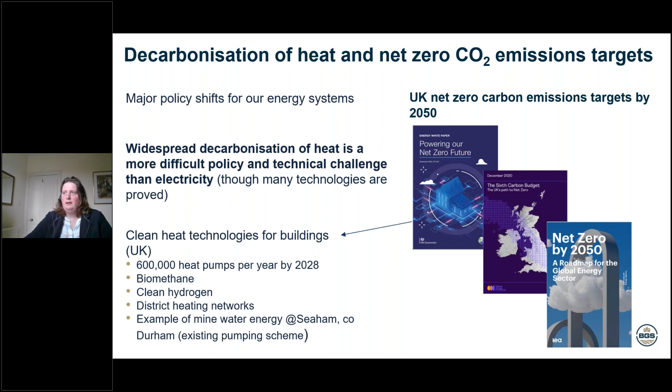And in more of a Scottish context, similarly, the Scottish Government obviously has an energy strategy, a climate change plan. It's done a lot of work around decarbonising heat, current legislation around district heating networks, and so on. The Scottish Government also has its National Performance Framework, which has an environmental aspect to it, which obviously covers energy, and energy from renewable sources is one of the aspects of that. And those link to the Sustainable Development Goals. So there's a lot of policy and strategy around this area, but it is a really big challenge.

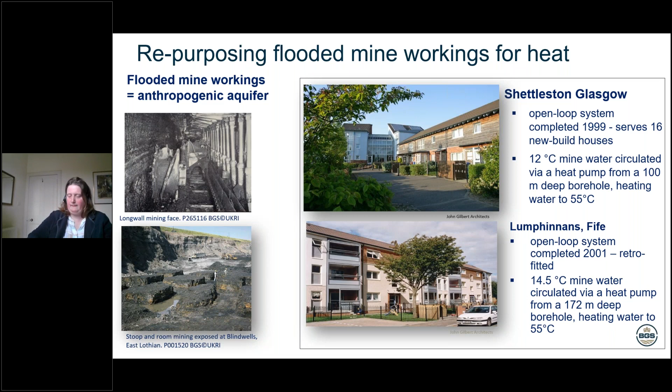So for the purposes of heat, that's very good, because heat is more difficult to transport than electricity. So having the heat where you need it is a really good thing. So the coincidence of urban centres and old coal mines is really helpful. It's also a very large resource. There's an awful lot of coal mining underneath central Scotland. I've not put a number here.

People have come up with numbers for the size of the resource, but really it depends on how sustainable you want the resource to be. And one of the things I'll talk about in the next slide is we can take heat out from underneath the ground. We can also potentially store heat under the ground interseasonally. And so it's not as simple as just saying we can take this much heat out. It's about having a sustainable, renewable system.

So as I mentioned, there are schemes in Scotland, but there are barriers to the widespread rollout of technologies such as this. So there's technical risk, and that's mainly what I'll talk about today in the talk about the observatory. The economic case can be challenging. There's a lot of upfront costs, and then there are operational costs compared to other technologies. And there's still quite a lot to be refined in the regulation and policy arena in terms of heat ownership and so on.

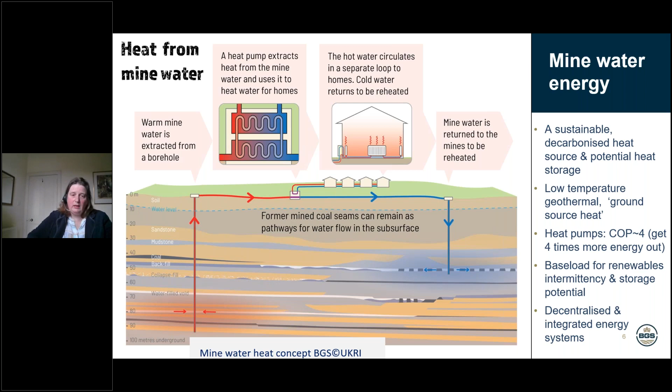the ongoing change. And then we have one borehole as part of the observatory, which is right over in Dalmarnock; this is the deepest borehole. It's 199 meters deep, and it's a seismic monitoring borehole now, but we had a cored geological section from that borehole. The boreholes at Cuningar Loop are of varying depths from 16 meters to about 85 to 90 meters deep. So they're not hugely deep boreholes, but they encounter the coal seams.

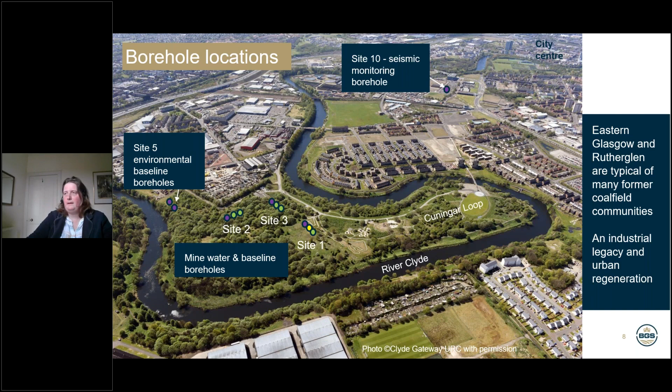So the shallow subsurface in this area is quite complex, and in order for it to become a public park, which is what this part of the loop is, there was a lot of remediation work done in public areas of that park. So it's a fairly typical area of many of the towns and cities across the UK in terms of its industrial legacy, and that's intentional. That is challenging some of the aspects we've had to deal with, but that's really what it's like in the urban area.

There's been a programme of public engagement which is ongoing around the observatory. Possibly of interest today, and I've got some slides on this later on, is there's a lot of work being done on the environmental baseline before we started work drilling the observatory and before researchers come and use it. So I'll talk about that in a little while.

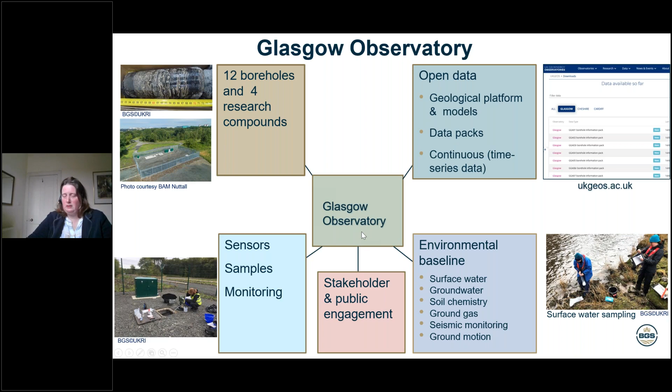And the boreholes have got fibre optic cables down the outside for distributed temperature sensing, and also electrical resistivity tomography cables to do cross-borehole flow monitoring. They also have hydrogeological data loggers within them, and the boreholes are just screened at the section of interest.

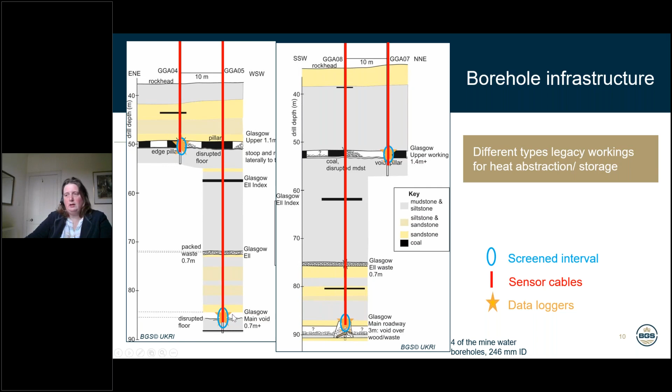So these boreholes are just screened at the mine workings encountered. The Upper is a mixture of wastes and stoop and room workings, and the Glasgow Main, which is the other interval that's screened across, is open voids and mining waste.

And what we're doing at the moment is a detailed design and implementation for geothermal infrastructure to be installed within the boreholes, and for a small heat centre to be installed on site. We don't have a heat user because it's a research infrastructure, and that gives us flexibility. But that infrastructure should be in place by early 2022. And what that means is there's a range of research and development themes that we hope people will come and use the observatory to look at for mine water energy.

Looking at the resource side, the environmental management, looking at the development of sensors and technologies to reduce cost and risk, looking at changes in the subsurface. So what happens when we use the geothermal infrastructure? What sort of responses do we get underground? It's also a place where people can come and do training and engagement to improve understanding of these technologies, and improve the supply chain and training of those who will hopefully be installing these systems in future.

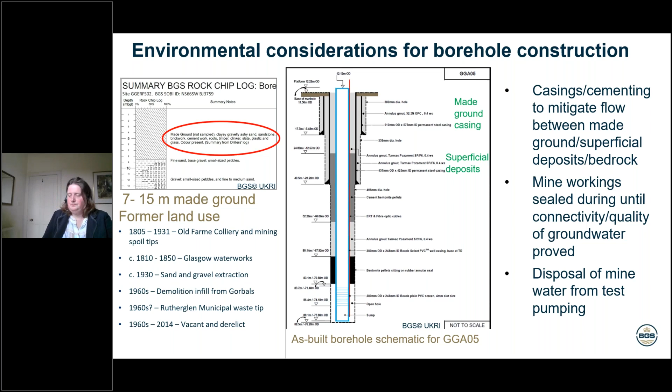Today I'd just cover the environmental baseline briefly. All this data is openly available, so it's just to give you a flavour, and it's something you can look at in more detail. We did soil chemistry surveys before we started drilling, ground gas surveys, surface water chemistry data sets, groundwater data sets, ground motion, and seismic monitoring.

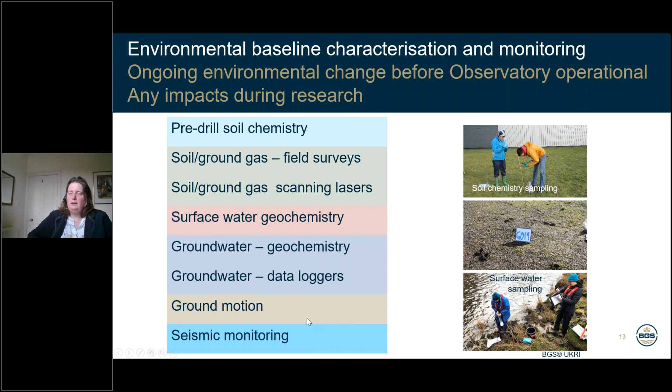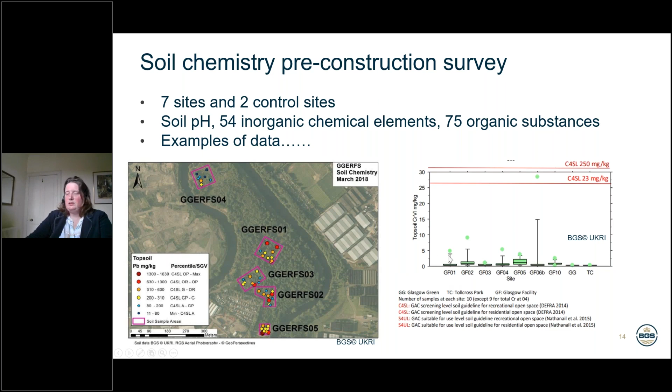Just three slides quickly to show some of that data. This is an example of the soil chemistry data set - a plot of lead, with box and whisker plots in the data set. This is chromium-6, which was a species of interest in this area, and actually was quite low here.

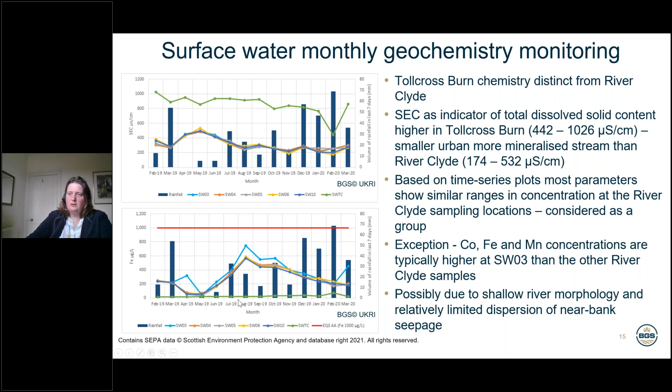These are examples of the surface water data. At the moment there's 14 months of surface water data from different sampling sites, with all sorts of information - this is a specific electrical conductivity plot. These are samples from the River Clyde, and this is from a tributary, which is much more mineralised. This is the plot of iron over the year in the Clyde and in the tributary, for example.

We also did gas surveys, and hope to carry on doing those. The summary of the gas survey so far is that we can't see any evidence of mine gas.

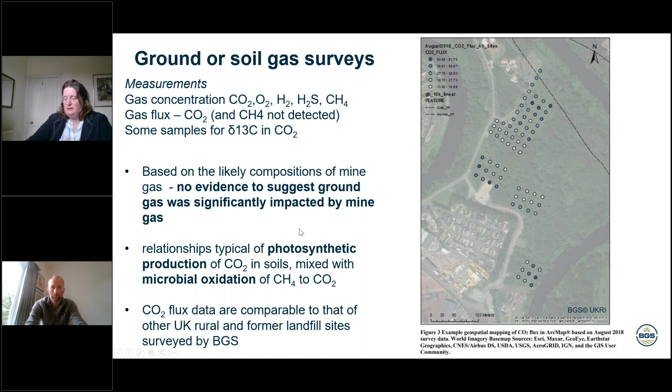I'll just skip this slide. I'm just going to finish off by saying we'd really like people to come and use the observatory. It's there for people to use - the details are on the website - and you can use it for whatever your particular area of research is.

We're really lucky in Scotland - we've got a unique world mine water research innovation infrastructure where people can come and do their own research to increase the evidence base about how to transfer heat sustainably. You can come and study monitoring and managing any wider impacts of those technologies or subsurface change, and innovate technologies all towards the decarbonisation of heat or underground energy storage. Thank you.

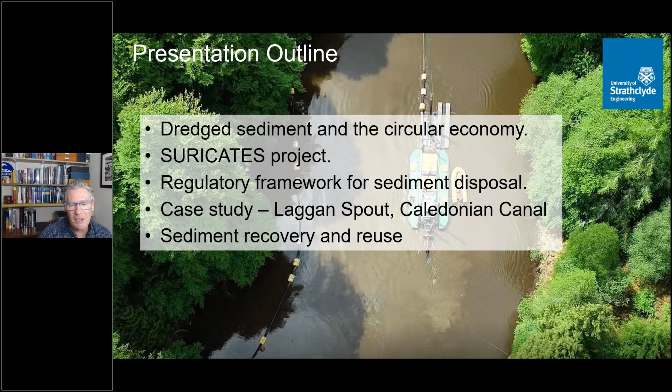So dredging is happening around us all the time. I took this photo last year of the HAM 316 dredger working on the River Clyde, which was there for, I believe, about 6 weeks in total.

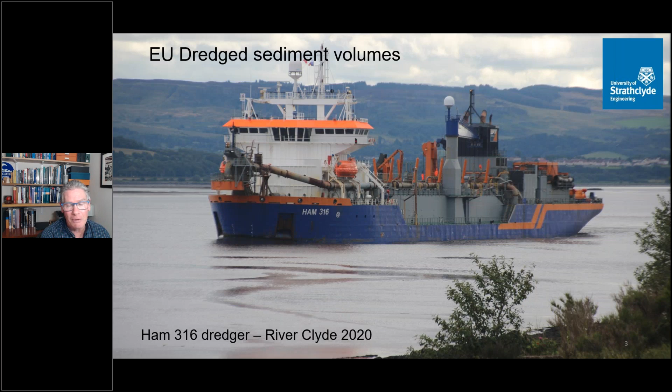Within the EU, there is a large volume of sediment that's dredged, roughly about 200 million cubic meters, which is classed as a waste. Only about 2 million cubic meters of that is reused. So there are great opportunities for more reuse and to contribute to the circular economy. The University of Strathclyde is a partner in the SURICATES project with Scottish Canals, and to date we've run 3 pilot studies on Scottish Canals.

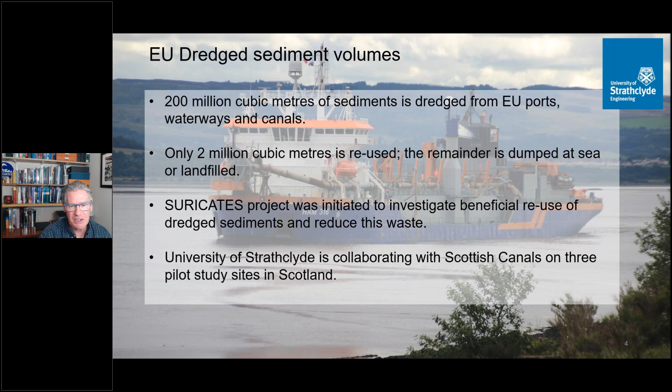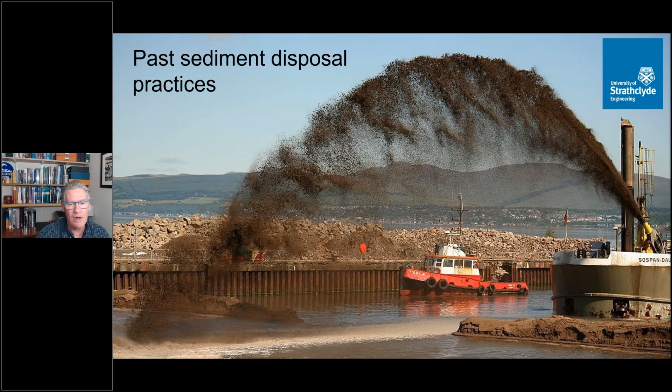Dredging is required in every navigable waterway, including the River Clyde. This was a photo taken a decade or so ago. It shows the practice of putting dredging sediment into some of the old docks along the River Clyde to infill that for future development. This practice is no longer allowed, and the normal disposal method at the moment is to dump that sediment at sea. However, there is a growing realization that we need a more sustainable practice and reuse this sediment for beneficial use.

You're probably familiar with the central diagram showing the circular economy. I've superimposed that on top of a drawing of the Falkirk Wheel, which I think is a nice analogy for beneficial reuse in the circular economy for dredged sediments, where we're taking the sediments and ultimately reusing it for some beneficial use such as flood control. Some treatment of the sediment is going to be required before it can be reused, and I will talk about that via our pilot study case study.

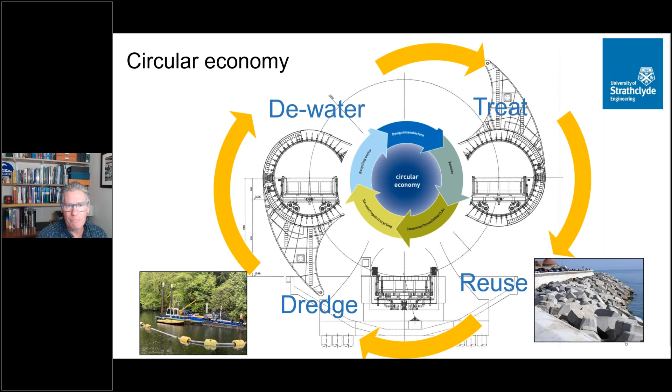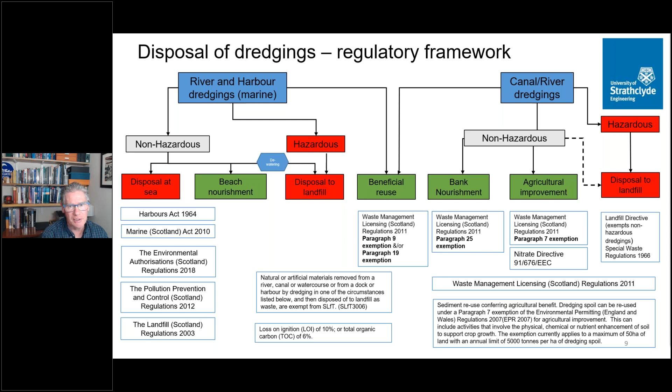Within the land disposal waste management licensing regulations, there are a number of exemptions that can be applied to dredgings, provided certain conditions are met. For this audience, perhaps the paragraph 9 exemption, which applies to brownfield sites, is most of interest. Often brownfield sites are conveniently situated next to waterways, especially if you think of the River Clyde, which opens up possibilities for reusing dredgings on brownfield sites.

Today I want to talk about our most recent pilot study, conducted at Laggan on the Caledonian Canal. This photo is taken looking south down the Great Glen towards Fort William. You can see Loch Lochy in the immediate background.

Looking in the other direction, you would ultimately end up at Inverness. You can see how steep the sides of the Great Glen are in this photo. That's important because the reason we are dredging at this location is because there's a high input of sediment into the canal from one of the many burns that feed into it. This is the Laggan burn, and successive storm events have built up quite a large deltaic structure in the canal that is an obstacle to navigation and has to be removed.

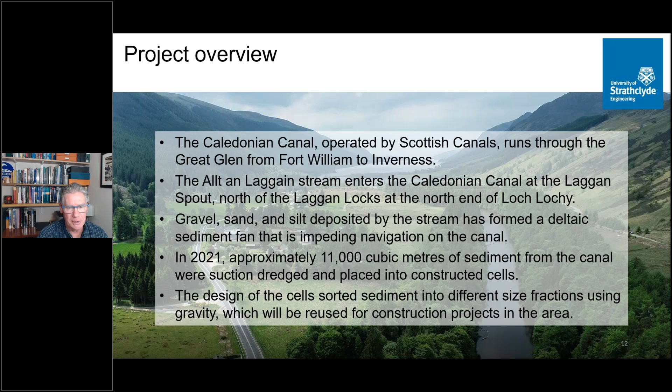In this photo you can just see the top of the sediment fan at this location. The canal should be about 4.5 meters deep at this point, but you can see it's peeking over the surface. You can probably tell it's quite a coarse but clean sediment, unlike the material in the previous slide, which reflects the rural environment and location of this site, and also the geology of the surrounding area.

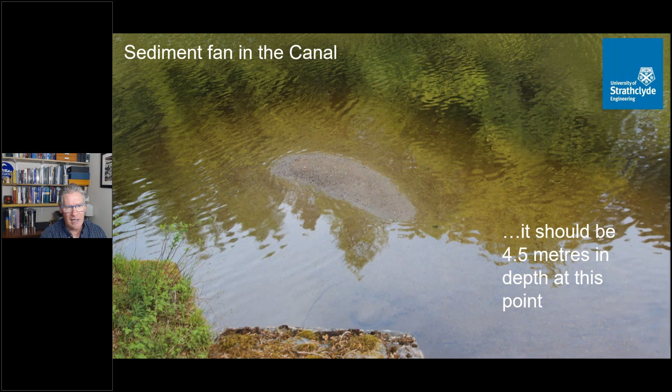We know that this material tends to only go into the canal during large flood events and heavy rainfall, which unfortunately are becoming more and more frequent as our climate changes. So that has a lot of impact on the maintenance of the canal. This is an ongoing problem that will have to be addressed every decade or so.

A major consideration was transporting sediment from the canal to the site. The actual dredging site is not really accessible by any vehicles, so we decided it was important to use suction dredging so that we could transport the sediment via a pipeline to the site, passing underneath the main road and avoiding any additional traffic and disruption to the A82, which is a major road there.

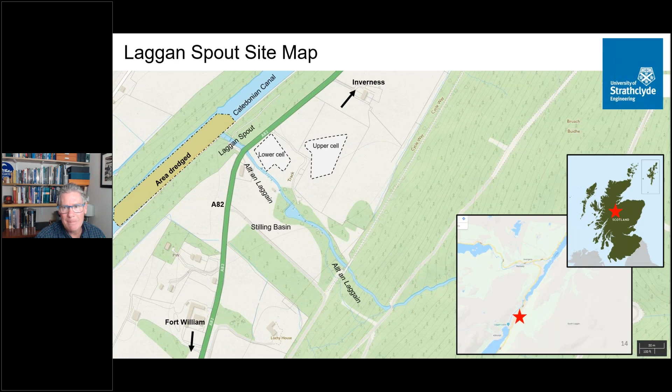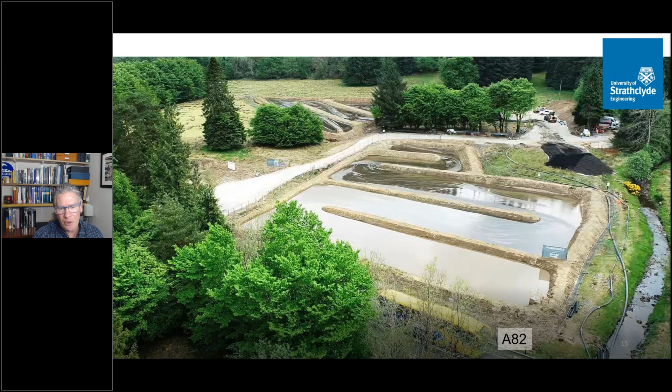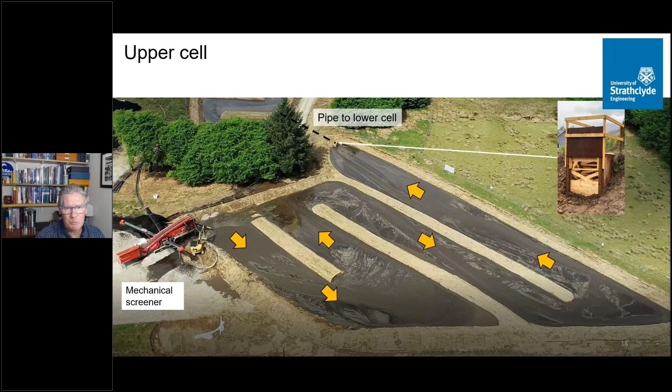You can actually see in this photo, at the top, just how clean the sand fraction is as it comes out of the discharge chute there.

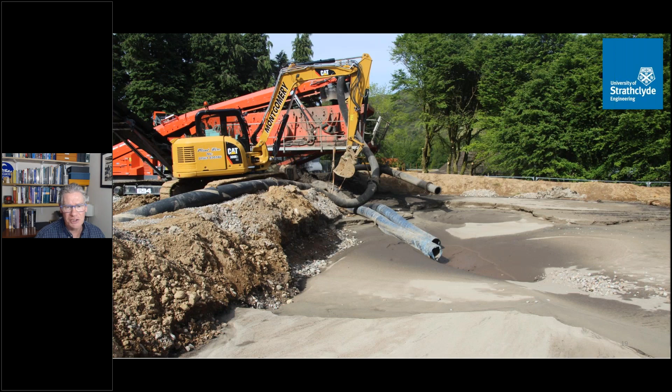In the lower cell, which was connected via a pipeline, again it flows through these bunds and ultimately would discharge back into the canal via another pipeline. The dredger pump operated typically about 12 hours each day, so that overnight settling could occur.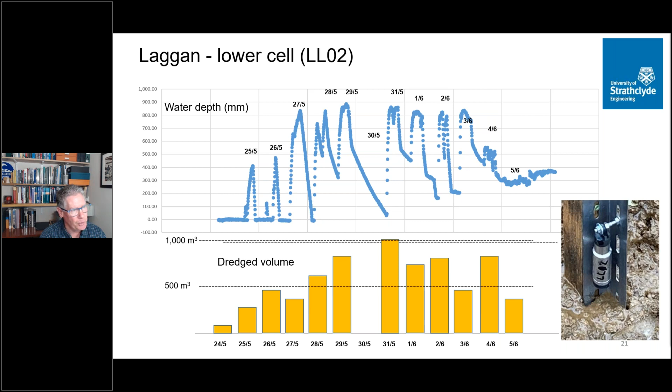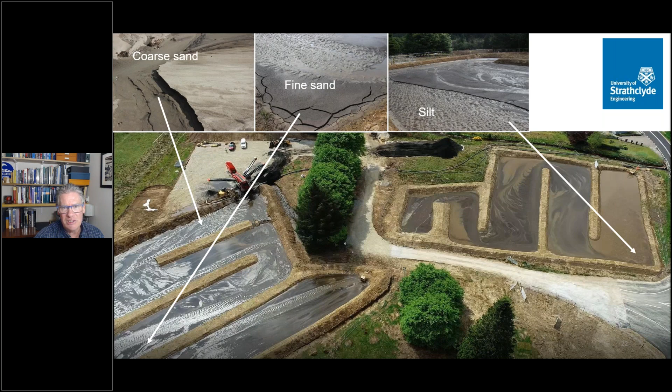Just to put some numbers on that, we're almost 95% sand fraction in the upper lagoon, dropping down to maybe 50% silt towards the bottom part of the lower cell. So quite a good separation there, and really all of the material in the upper cell was a usable sand fraction.

You can also see that the organic matter drops from under 1% in the upper lagoon to maybe as high as 14% in the bottom cell, again showing that the finer material has accumulated with the silt fraction.

So by the close of dredging, we produced a number of different sediment fractions. From the screener, we got smaller fractions and some fairly large cobbles.

If you look at the dark pile behind this, you can see how much of the organic matter is composed of the gravel fraction there, and that's kind of mostly pine cones, which are kind of the same size as that gravel. So the screener was very effective at doing that.

And this pile had kind of had the consistency of bark mulch, and has some uses in its own right there.

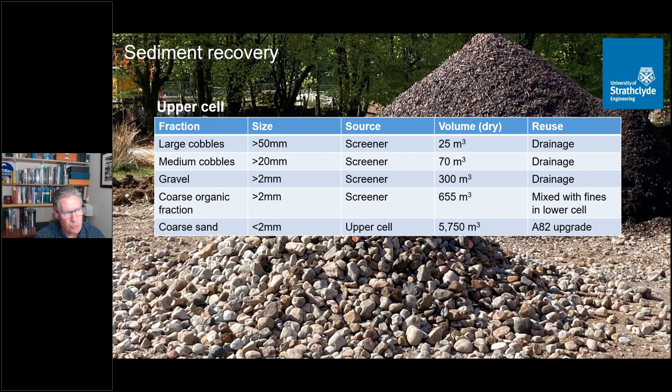This sand fraction we hope to be able to use in a proposed road upgrade at the A82. The organic fraction is going to be mixed with the material in the lower cell, which, as you can see here, is more of a silty loam, sandy loam that really is ideal as a way to restore the agricultural land that was used for this pilot.

So the plan is to really grade that with the organic matter and then return the field to use. We took samples that did meet the BS 3882 specification for topsoil, with the exception of the nutrients, which can readily be added at any time.

A second use that we looked at was to use some of the coarser fractions, the gravel and the sand, to make concrete blocks. These would be used for flood protection on the small Laggan burn. We also made some test blocks, which we tested and achieved a strength of about 7.5 megapascals, which is not bad for a concrete of this type made from fresh sediment.

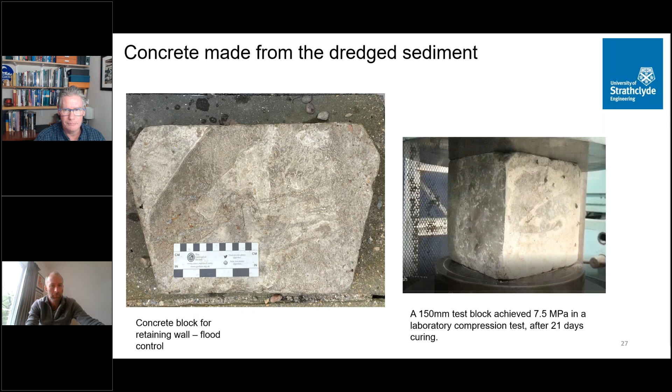So some of the beneficial reuse options - fortuitously, Transport Scotland have proposed upgrading this section of the A82, putting in a new bridge and changing the curve to eliminate a dangerous bend there. These works will require quite a bit of aggregate to build the embankments and do all the earthworks required for this, and Scottish Canals are currently in discussion with Transport Scotland to retain the sediment on site for use in this project, which would probably happen in 2022-2023. We've been able to contribute to the design of that project from the data we've collected on the hydrology of the Allt an Laggain burn that passes through the site.

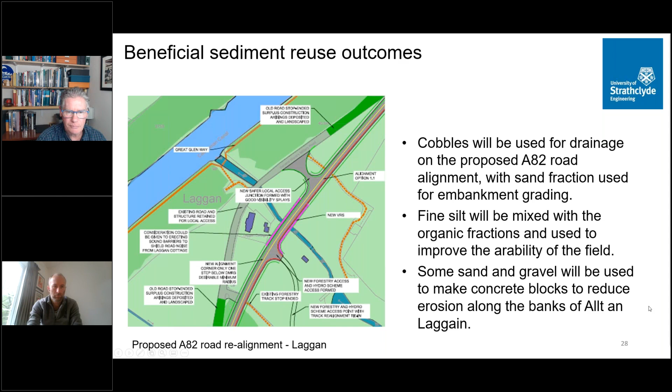So I'll just finish here to conclude. We demonstrated the viability of suction dredging and gravity separation for beneficial reuse, and we produced over 6,000 cubic meters of aggregates that will be available for the A82 road realignment project. The final material in the lower cell is suitable for topsoil and will be used to restore that field to agricultural use.

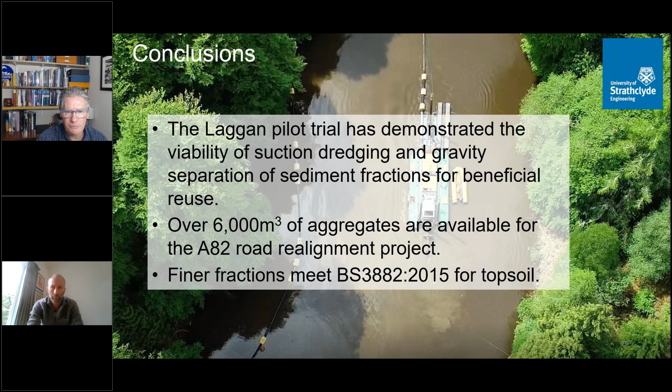And that's pretty much it. If we have time for questions, I'll be happy to take those, or we can save it till the end.

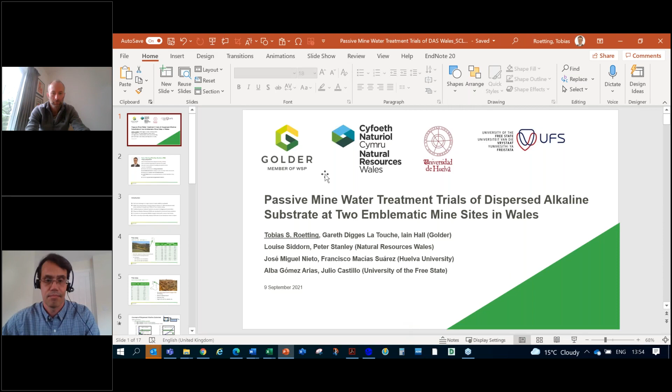Tobias, if you want to just accept that, you should have a prompt. Yeah, should be working in a moment. There we go, yeah. Great, and you should be able to share your screen as well. Brilliant, let me see, I still have a bit of changing over here in screens. Yeah, okay, let me see. That's it, perfect, yeah, okay. Can everybody see my screen now?

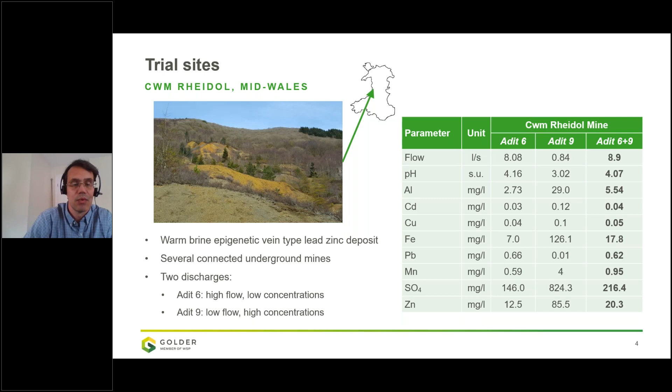The other trial site is Parys Mountain, which is in the north of Wales on the Isle of Anglesey, and this was the largest source of copper in the 18th century, and it's a massive sulfide deposit, which is similar to the mines in Spain where we are operating these systems. It's an open-cast mine, and you can see from the colors, there's a lot of metal leaching going on in the open pit. And we have very high iron concentrations, 650 milligrams per liter, and also significant zinc, aluminium, copper, manganese. And the pH is quite low, 2.5. And again, the full flow rate on average is 8.4 liters per second. And these 2 mines are amongst the top 5 most polluting mine sites in Wales. So finding a method to remediate these waters would be very beneficial.

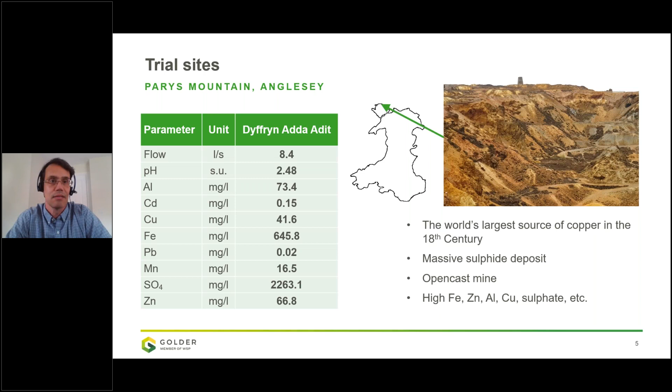So to explain the concept of dispersed alkaline substrate, it is similar to many passive treatment systems, as you can see on the top right, in that it consists of a downflow reactor. So mine water is fed to the supernatant on the top, then it flows down through the reactive substrate into a drainage layer, and then through a swan neck out into a decantation pond to precipitate metals. And in these systems, we want to have a substrate which is, on the one hand, permeable, so water can flow through by gravity, and which is reactive over a long time.

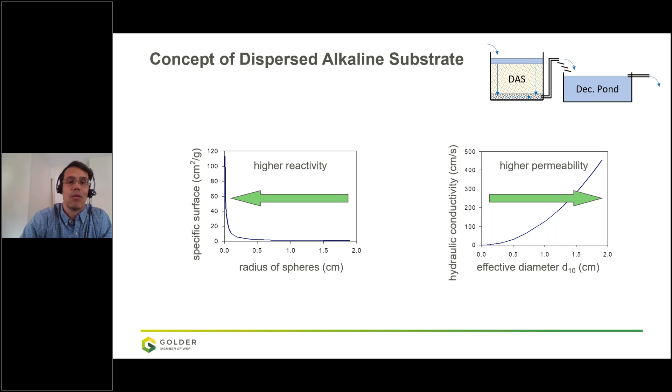Now this is a challenge because to have a high permeability we need a coarse substrate, but to have a high reactivity we need a large reactive surface area, which you normally achieve by having a fine-grained substrate. So what we do is we combine a fine-grained alkaline material which has a high reactive surface and also which enables a larger fraction of the material to dissolve before it's completely coated by metals. And then we mix this fine material with a coarse supporting matrix, which provides a large pore space where the metals can accumulate without clogging the pores completely.

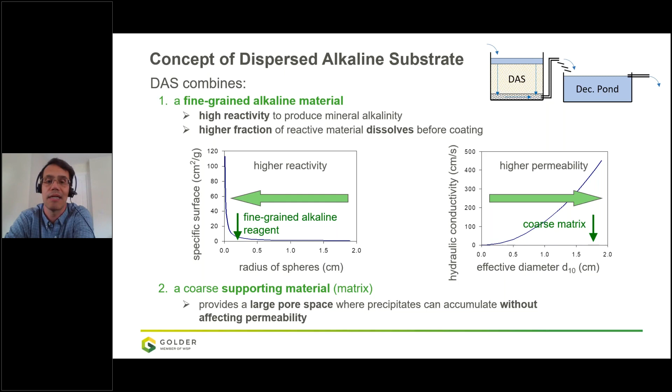So the first trial was set up last December at Cwm Rheidol. Here you can see the site. It's a relatively small area we have available. And we've put in 3 treatment trains. So the first treatment train treats the mixed discharge from adits 6 and 9. First with a reactive tank which contains dispersed alkaline substrate with calcite. And then a second tank which contains barium carbonate. The calcite is aimed to remove mainly iron and aluminium, and the barium carbonate can react with the sulfate in the water and can also precipitate sulfate. And it also increases pH further and then can precipitate metals like zinc and manganese.

And then we have a final decantation pond in train 1, which you can see here on the right-hand side of the photo. For treatment train 2, we have again 2 reactive tanks, first calcite, a sedimentation pond, then magnesium oxide, and then another sedimentation pond, which is here in the center part. And the magnesium oxide can increase pH of the water to about pH 10. At this pH, many of the trace metals like zinc, cadmium, manganese are not soluble and are removed.

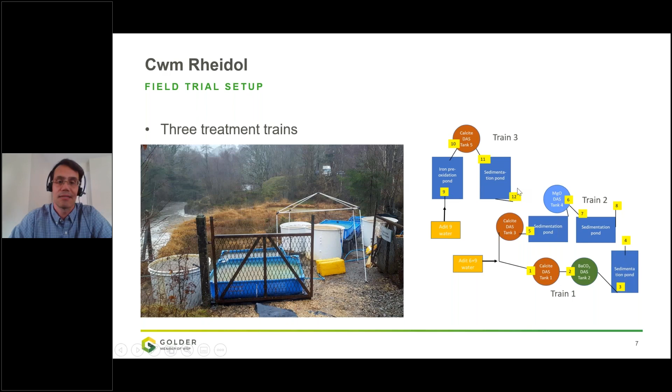So I'd like to present some results from the first 9 months of operation. So first we can see the evolution of pH. In the first treatment train, water comes in at pH 3.5, and in the first calcite tank, it increases to about pH 7. And then in the barium carbonate tank, it increases further. And at the outflow, we have a pH of between 7 and 8. So near neutral water, which is good for discharge.

In the second treatment train, again, inflows at pH 3.5. The first calcite tank increases pH to between 6 and 8, and magnesium oxide increases pH to between 10 and 10.5, and then the outflow at the decantation pond goes down to an average of pH 9.5, which is a bit high, but it has good treatment efficiency, as you'll see on the next slides. And in treatment train 3, pH is lower, just pH 3, and increases to pH 6 to 7 at the outflow.

Now we come to the more interesting part, which are the metals. So iron inflow in the mixed discharge is usually around 20 milligrams per liter, sometimes a bit higher if there's a lot of suspended iron. And the calcite tank is able to remove most of the iron from the water, and then not much happens in the second tank. Same for treatment train 2, and in treatment train 3, where we have iron concentration around 100 milligrams per liter. On average, a single calcite tank can remove about 60 milligrams of iron. So in order to remove all the iron, we would have to add another calcite tank on a treatment train for that water.

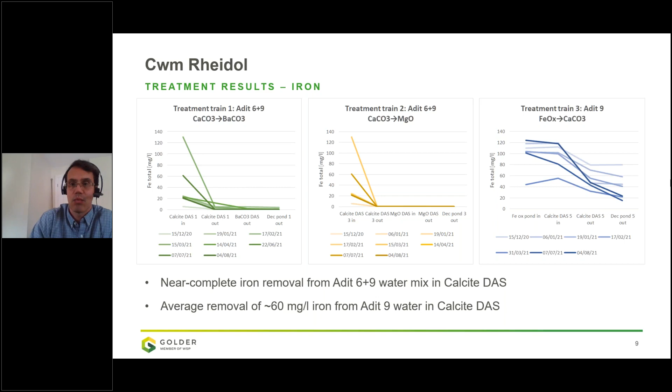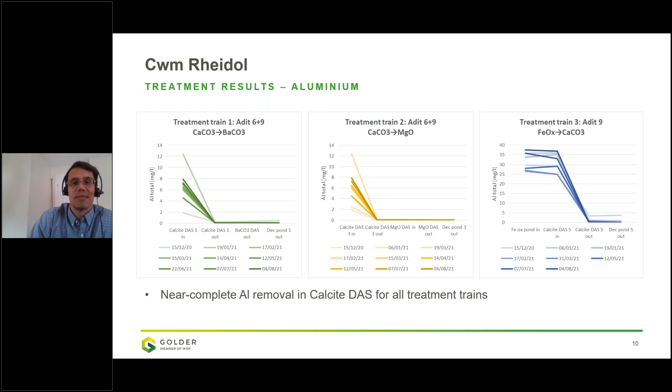For aluminium, again, the calcite tank removes all the aluminium from the water, and no aluminium is left in the second treatment tank to be removed. And for zinc, in the first treatment train, we have good removal of zinc in the calcite tank, which is surprising because calcite normally doesn't remove zinc. But due to the wood chips, we also have some sulfate reduction going on in the tank, and that removes our zinc in the first treatment train.

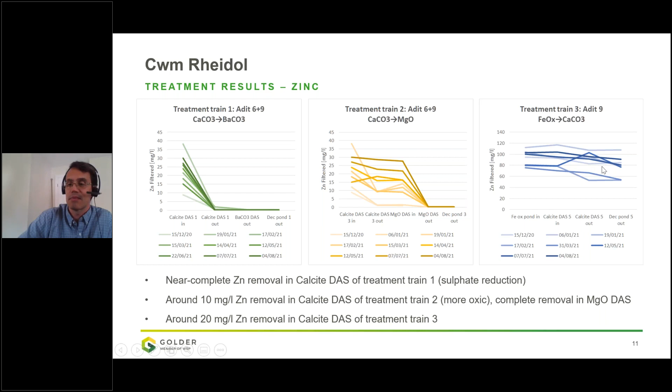In the second treatment train, where we use a different type of wood chip, which isn't leaching organic carbon as much as in train 1, we have less zinc removal in the calcite tank, but then the magnesium oxide tank removes all our zinc. And in treatment train 3, as it's only calcite, we have hardly any zinc removal as we would expect. So we could add another tank afterwards, for example, magnesium oxide, to remove the zinc in the second treatment step.

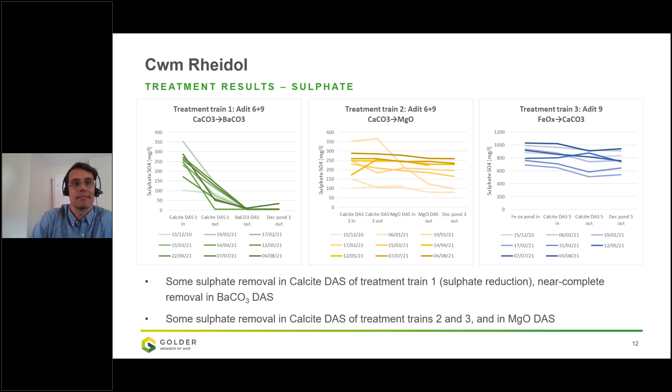For Parys Mountain, we set up the system in late spring, and we were starting up the system, filling all the tanks. As we have higher metal concentrations, we need more reactors, and we've installed 2 treatment trains in the trial. The first train has 2 calcite tanks with sedimentation ponds in between, and a final magnesium oxide tank. And the second treatment train again has 2 calcite tanks and then a barium carbonate tank and sedimentation ponds.

And here we are also using an initial pre-oxidation tank, which is just a decantation pond, because with these high metal concentrations, often some iron will precipitate spontaneously if residence time is long enough and if it has access to oxygen. So we can remove some iron here without any reagent dosing, and then we can start removing more iron in the actual treatment tanks.

And at Parys Mountain, we don't have sufficient head available, so we need to feed the system by a solar-powered peristaltic pump, which takes water from the mine adit and then feeds it into the system.